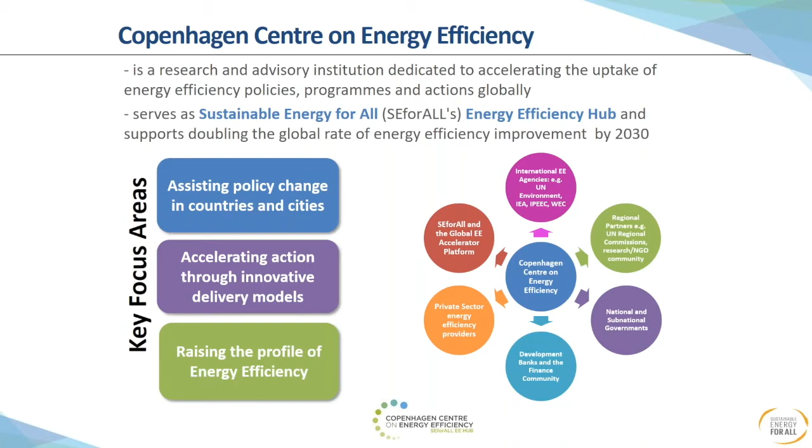A few things about the Copenhagen Center. The center conducts research and advisory activities in the field of energy efficiency and serves as energy efficiency hub for the Sustainable Energy for All initiative. The center has an established network of global, regional, and national partners with a broad range of stakeholders to help accelerate the implementation of energy efficiency activities.

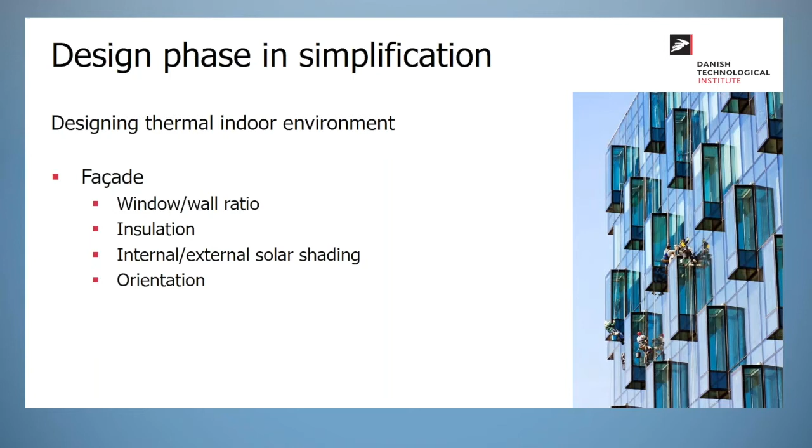To begin with, I will just take some outtakes from the facade, saying that the window and wall ratio is important, as well as the insulation level. Whether you are going to use internal or external solar shading or not use solar shading at all, and as well in which direction your office is orientated. These next slides are another selection of important parameters in the design phase. The next is the ventilation.

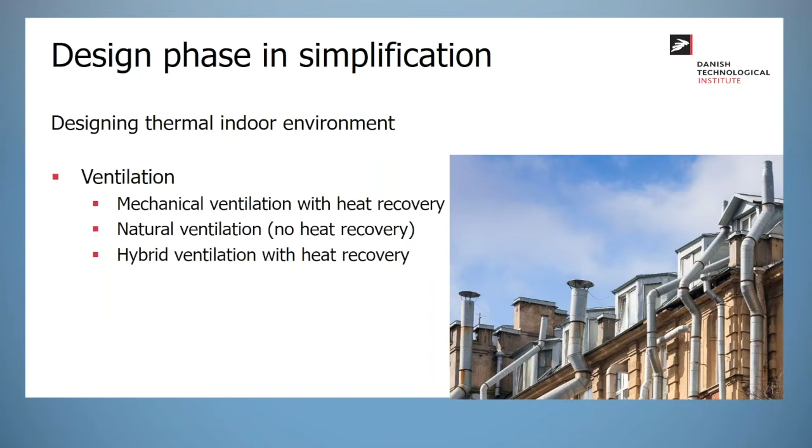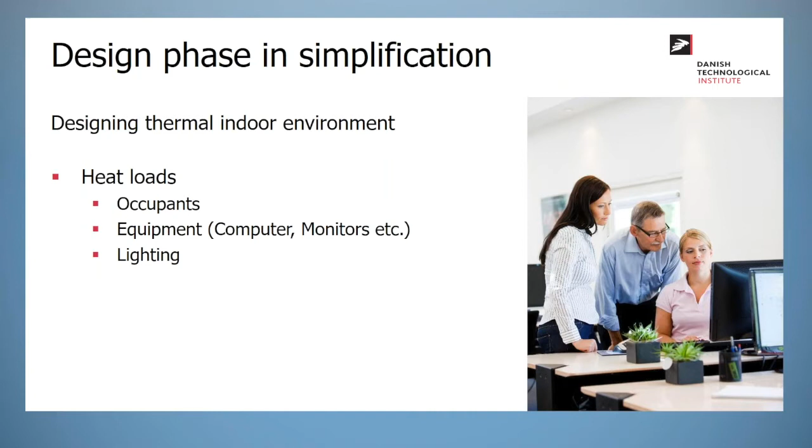I specified 3 types of ventilation: the mechanical balanced ventilation with heat recovery, the natural ventilation from windows, window openings, etc., with no heat recovery, and the newer way of doing it, the hybrid ventilation with heat recovery. Last but not least, it's very important what you assume about your heat loads. Here I specified occupants, equipment, and lighting. And I'm going to get back to why it's so important to have the right assumptions later on.

The operation phase is when the building has been built, and this is where you're going to see the differences between what you designed and assumed in your design phase and what is actually happening in the building. Here it's very important to know that things can happen in the building that you couldn't know in your design phase, and therefore your assumptions can be more or less accurate.

Regarding the facade, it's very important to know how it's possible to operate the internal or external solar shading. Occupants that can manually override the solar shading can make a huge impact on the designed assumptions.

On the ventilation, there can as well be seen differences between what you measure your inlet temperature to be in the room and what you measure it to be at the ventilation unit. This is important to, in some cases, follow up on if you can see that the room temperature remains maybe 1 or 2 degrees higher than what you would expect.

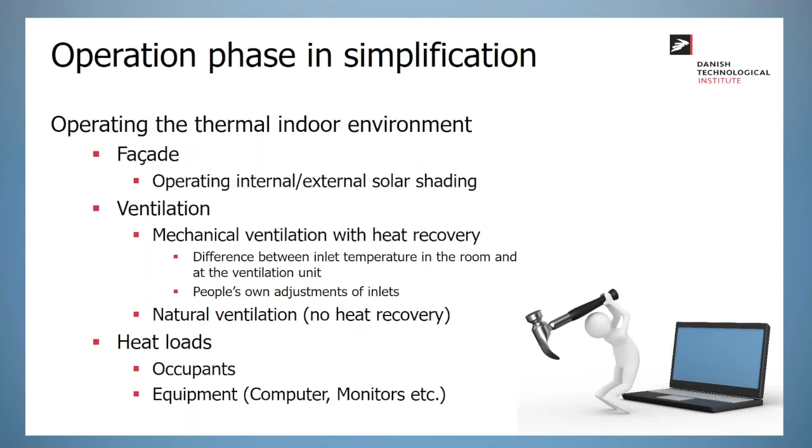Furthermore, I think that technical components must be integrated on the same platform to work energy efficiently, and user behavior must be understood in relation to the usage of the building. That said, depending on whether the building is used for households or offices or other usages, it's important to understand that the occupants in the building might behave differently.

I'm going to start out with what I call the simple technical solution. This is maybe, at least in Denmark, the old-fashioned way where you manually control most of it. You could either have natural ventilation or mechanical ventilation. But besides that, you manually control the thermostat on the radiator, the solar shading if it's even there, and you can expect that there is no cooling to the ventilation.

This way, it's very dependent on the user, and if the user is actually controlling it or not. This can both be a good way to do it, but it can as well be a bad way to do it. What is really important here is that the user needs to understand how, for instance, the thermostat is working and what the solar shading is actually helping with in terms of the indoor environment.

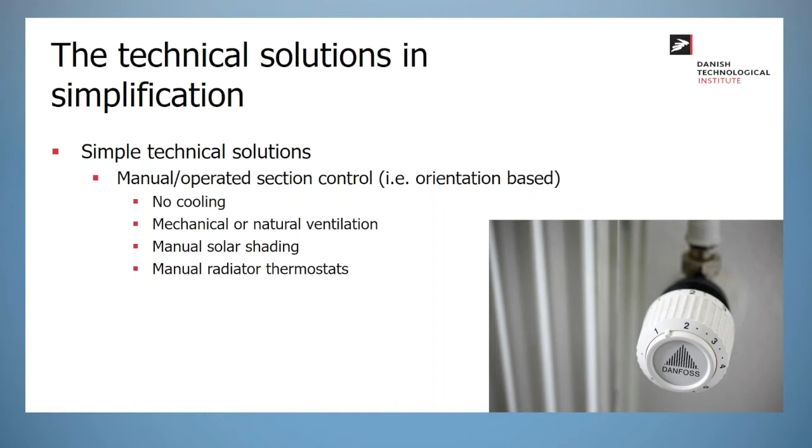And it's very important as well to be aware that if the room is already overheated, if you have no mechanical cooling, it can be very, very difficult, if not impossible, to cool your room down to a more comfortable temperature the same day.

Moving on to what I call the moderate technical solution. This is more like a present solution in Denmark. This is the typical way to build, where you have central cooling coils in the ventilation system. You're using mechanical balanced ventilation, and you can have manually operated solar shading as well as radiator thermostats. Depending on how much the user can interfere with the radiator and the solar shading, and maybe as well the window openings, the assumptions here can be very different from what you would experience in the building.

As well, this is a way to operate on what I call a section level. This is not on a room level where every single user can change and optimize to its most comfortable indoor environment. This is maybe a way to control it in a section facing south and north or something like that.

It's very common in Denmark, and it's a good way to control the indoor environment and be able to reduce the temperature during summer. And it's as well a way to take some of the responsibility from the user, but it can also be of great discussion if many of the users are uncomfortable in that indoor environment.

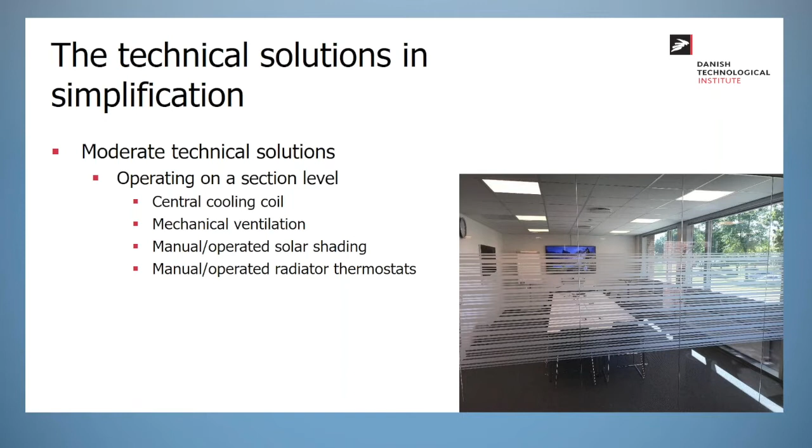The last technical solution is what I call the advanced technical solution. This is maybe what we would say is the smart building.

This is basically done by selecting what room temperature you want, and maybe the light level, and what is maybe not explained so much in this type of technical solution is what the user is actually controlling, and maybe as well what the user is not controlling. Because what we often see is that they want to control the solar shading. So when the sun is shining, they still want to look out their windows, have the good view. But what they do is actually letting in a lot of heat from the sun.

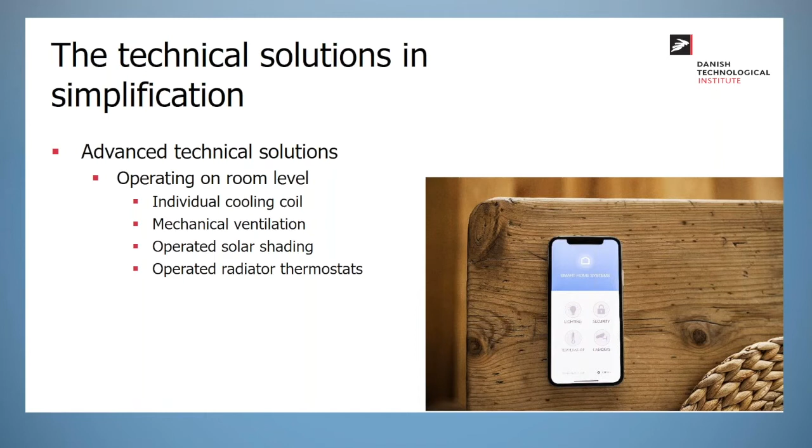Thank you very much, Kasper. And now we can start with the second poll of the day. So, overall, how technical is your work? Is it simple, moderate, advanced, or you don't know? Thank you very much for your answers. So we can see that 15% of you answer that the work is simply technical, 31% that it is moderately technical, 50% advanced, and 4% of you don't know. Thank you very much for your answers. And now we can start again with another presentation from Babette.

Yes, thank you, Valeria. And thank you so much for attending, all of you. I will be discussing how user behavior is crucial for smart operation of buildings. I will be talking from a perspective of energy anthropology. And energy anthropology is about the encounter between people and technology. So it is anthropology, as you might know it, like the knowledge of why and how people behave the way they do. But this is very specified in the perspective of energy efficiency, energy flexibility, and also indoor environment. So that's what I will be trying to cover today.

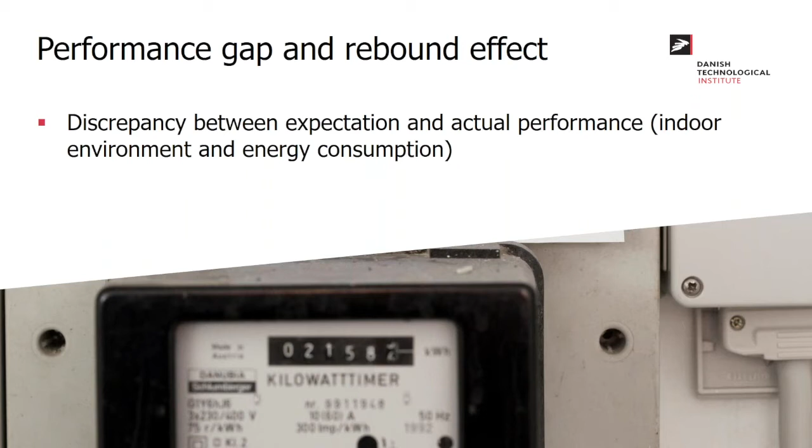So the notion you have to remember before we go into all these cases I have with me today is that you can't really avoid behavior no matter what type of building you have and how advanced the technology is. Whether you're talking about single family households or LEED certified smart buildings, no matter what type of building you have, occupant behavior directly influences energy consumption and indoor environment. And that's something we need to be better at keeping in mind when we work with these issues and try to energy optimize and make better technology.

So in order to illustrate that, I have some cases with me today. The first two are about identifying non-technical behavior-related barriers for smart solutions. One is for a university building, another is for daycare institutions. The third one is a bit different. That's a project we are working on right now, a more extensive study on these issues, and that's about smart interaction between building and users. But let's start with the first one. That one is from a university building.

The project is about data-driven building management of energy-efficient buildings. So this one is specifically about these very advanced technological solutions that Kasper was talking about on his different levels. The project is about decreasing this performance gap because we can see the more advanced a building you have and the more energy efficient you try to make it, the higher performance gap we have. So it's something we really need to be able to fix because we're trying to make more and more of these kinds of buildings. This specific building was newly constructed and smart, a lot of high-tech smart solutions.

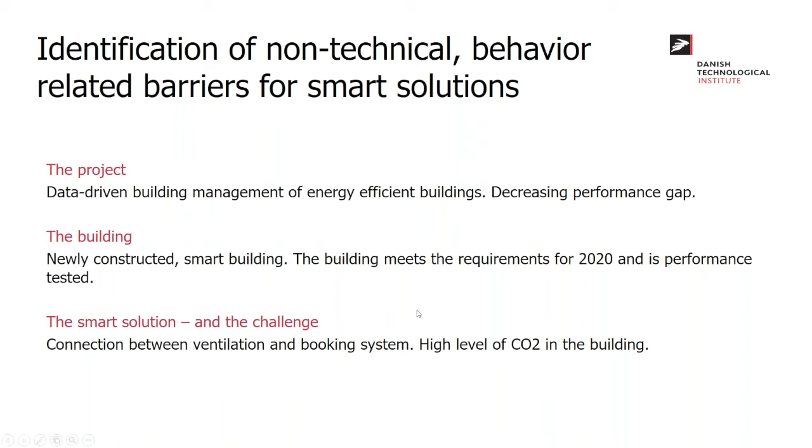And that's quite interesting, that quote, because there's a lot of buzz and hype about IoT, and we need to have more technology, it needs to be intelligent and all this. And then we have the people on the ground who are actually dreading it. To begin with, it seems maybe a bit strange, but it actually makes a lot of sense when you start talking to these people actually operating the buildings.

The idea of putting a lot of technology into a building is often that you try to cut down the man hours, and it's supposed to just control itself and kind of take people out of the equation. But what this guy told me is that he actually had to increase his work tasks now, because someone has to put up the sensors, someone has to calibrate them, someone has to react when there are alarms on them, someone has to see if the data looks correct, and all these things.

So actually, the more technology they put into this building, the more work he has to do, even though it's supposed to make it more automated and less work for him. So I think that's a very relevant perspective to remember when considering putting more technology into buildings. Is that actually doing what we want it to do? Or could we just find another point where it would meet our needs and not just make extra work?

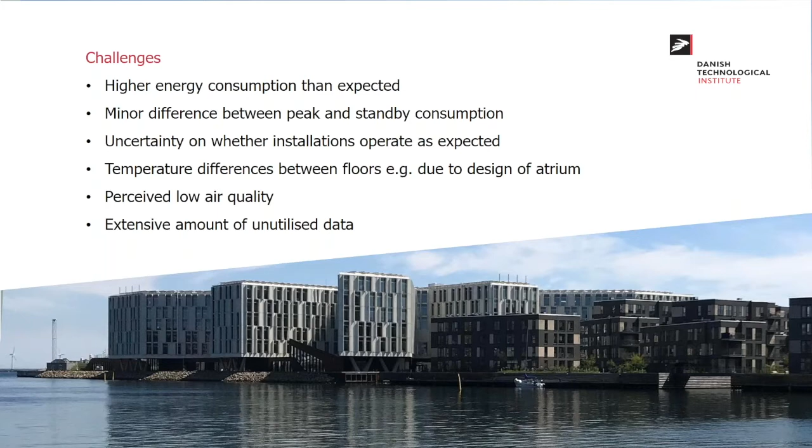So our preliminary conclusions in this building are that, first of all, regarding the operation, there is some unclear division of responsibilities. Who is supposed to do what? When you have multiple organizations and someone owns the building, someone rents, all these different dynamics will mean something to this division of responsibilities. Who's supposed to do what? You have the energy consumption and indoor environment. It's not a specified work task. You don't have someone's contract where it's specified this is something you need to work with. And these preliminary conclusions are something we see in other similar buildings as well.

Then we have this thing about the energy management. It relies very heavily on the individual. Is it someone who by chance has an education that makes them able to manage it? Maybe they have a personal interest in it, and maybe they have a competence from other things they've done before. But it's very random, so to speak, and it makes it very vulnerable if this person changes job or the structure changes or something like that. There's a lack of general procedures about this.

And then regarding the end users, we see that user expectations of the building are not aligned with reality, and that users lack knowledge of their impact on the building. And it's something general with end users as well. This thing of measured values and the human experience. Even though you can prove with objective data that the indoor environment in this building is perfect, that's just not gonna cut it if people have a different experience. So it's about explaining what you can expect from a building like this, and what is just not possible.

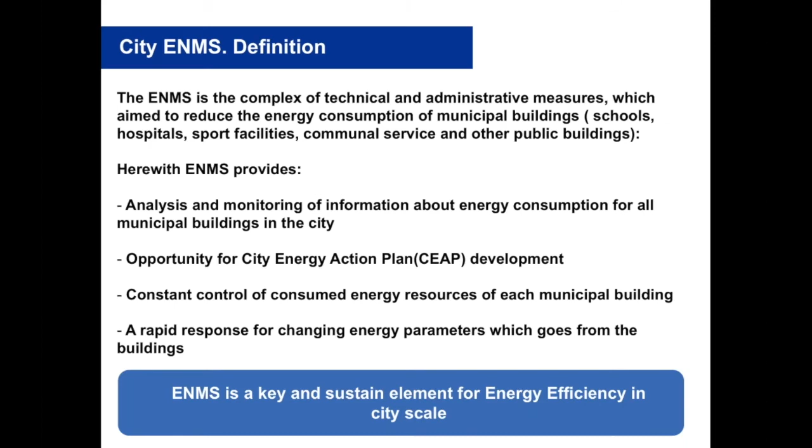And here we can even track the size and the possibilities of the smart solutions, and even understand maybe their oversize for the specific building. So what I want to say is that we need to implement a proper functioning monitoring system when we are speaking about smart buildings integrated in a smart city. Proper functioning monitoring system will allow us to track the performance of the buildings that were newly constructed or retrofitted or just operated in the region.

And we also need to understand that there are certain steps, certain tasks that need to be resolved before we can say that proper monitoring system is in place. Sure, we need to have all the energy meters and the other relevant measurement equipment installed and ready to be connected to some remote data connection. On the other hand, we need to have energy manager in place who will be really dedicated and motivated to conduct proper energy analysis and calculate the energy efficiency of the specific buildings.

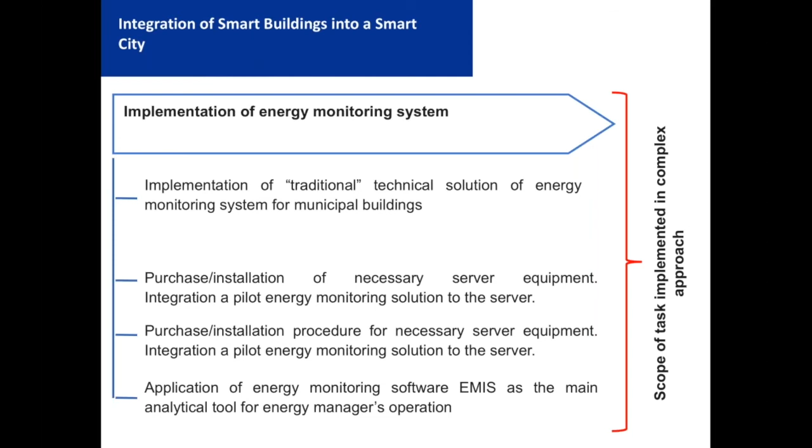Sure, we are not speaking about just self-motivation of such kind of energy manager. This person should be trained and should have a certain guidance with certain methodological steps, like step number 1, number 2, number 3, how he or she needs to track the energy consumption. What does it mean, good or bad energy consumption? What are the deviations? How they can appear? What are the seasonal and other factors that are making impact on all of these figures? This is the real role of the energy manager.

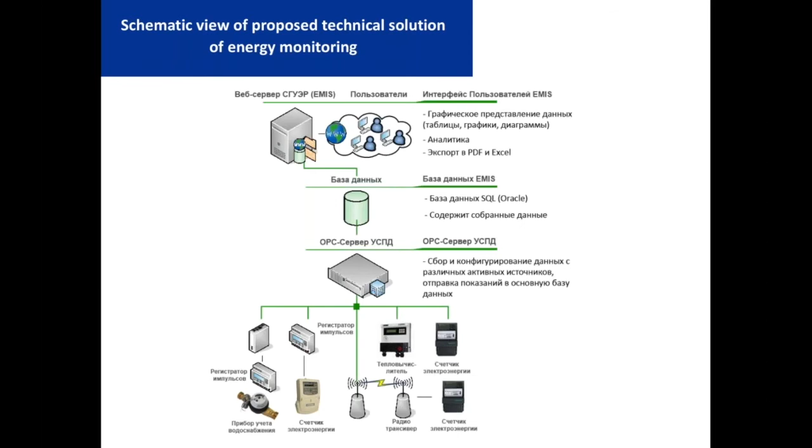Here we can see the schematic view of the remote data control system that is actually similar all over across the world. So you have a certain server that collects on a cloud basis all the data. You have certain equipment that collects data on the ground from the energy resources, and some calculators or transmitters that really calculate the consumption rate of specific energy resource. That's it. And sure, it could be done on the internet base with the web platform with an attractive interface. But again, we can raise a question: who will be the operator of such kind of software?

Yes, we are speaking now about giving a better role, a bigger role for the people who are operating on the ground all this smart equipment that is installed in the building. And here we can see some developed algorithm of action for energy manager. And this person should make some analysis of current structure, existing city administrative structure in terms of energy use, or maybe building structure in terms of energy use, if we are speaking about a specific building.

Then we need to understand which actions we can take in a midterm and long-term perspective. Which kind of actions could give us immediate result, and we can call them even low cost or no cost measures, and which kind of actions will give us result only in a long-term perspective, but we should invest in them now, otherwise we will lose our capacity and efficiency at the moment. We don't need to forget that all investments that we will do today will be cheaper for several inflations compared to the investment that will be done in 2 or 3 years.

So that means that investing in energy efficiency now is much cheaper and smarter than waiting until our system will be broken and will be ready for a real capital retrofit. Sure, we need to develop a certain methodology for sustainable energy action plans, or sustainable city energy action plans if we are speaking about the city scale, where we need to include the smart buildings integration and smart perspective of

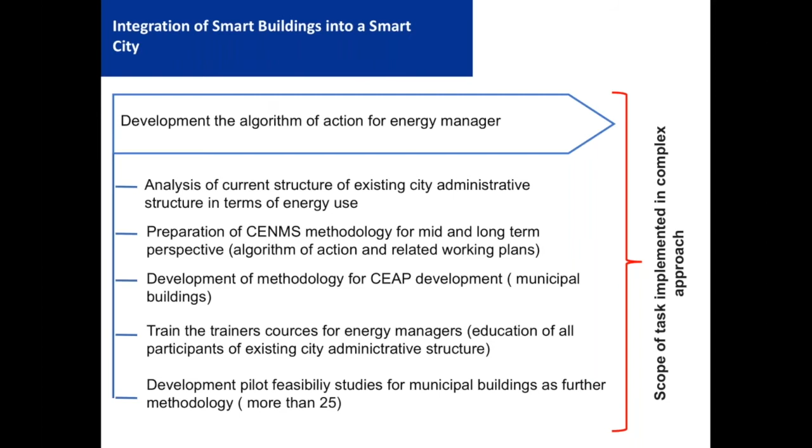the buildings. But nevertheless, we need to understand that without properly trained people on the ground, we could not make it happen. So we shouldn't forget to integrate trainer courses for energy managers, educate them from the administrative perspective, from the municipality level, from the departments level, and from the buildings level as well. All the buildings that consume energy surely have their own energy management system in place. But the question is how they can measure and evaluate its efficiency.

So not all the data that will be collected should be presented to all members of the society or for this energy management system. For example, the deputy mayor should have only the overall big figures. Some departments should have access to some detailed figures on specific levels of consumption per day, for example. But people who are responsible for the maintenance and the energy consumption level in specific buildings should have immediate access to all available data collected for this building.

So, in the conclusion of my presentation, I also want to mention several practical lessons learned during my professional career. Sometimes, if we are speaking about implementation of smart buildings in a smart city, there is an absence of understanding of the role of energy managers in departments or in the communal service companies, and there is an absence of this position. Sometimes it should be budgetary financed, and for big cities it is always a problem how we can do it.